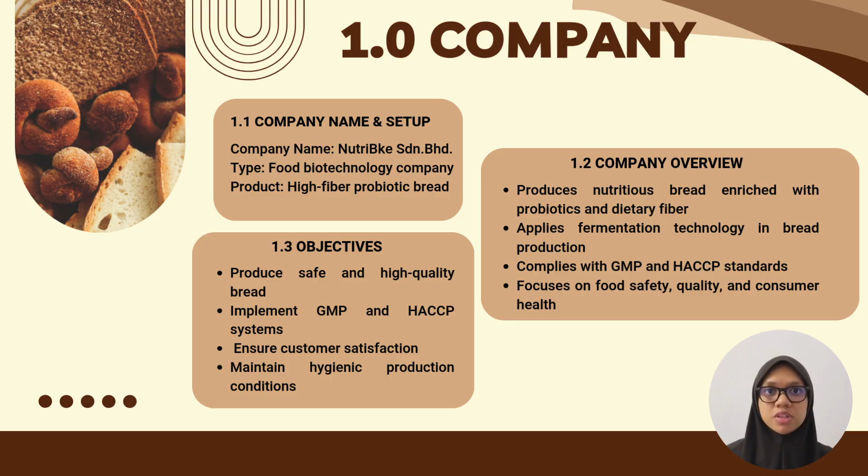NutriBke Sdn. Bhd. is a food biotechnology company that produces high-fiber probiotic bread. Our product combines dietary fiber and beneficial microorganisms to promote better digestive health. The company applies fermentation technology and follows GMP and HACCP requirements to ensure food safety and product quality. Our objectives are to produce safe and high-quality bread, maintain hygienic manufacturing conditions, and achieve customer satisfaction.

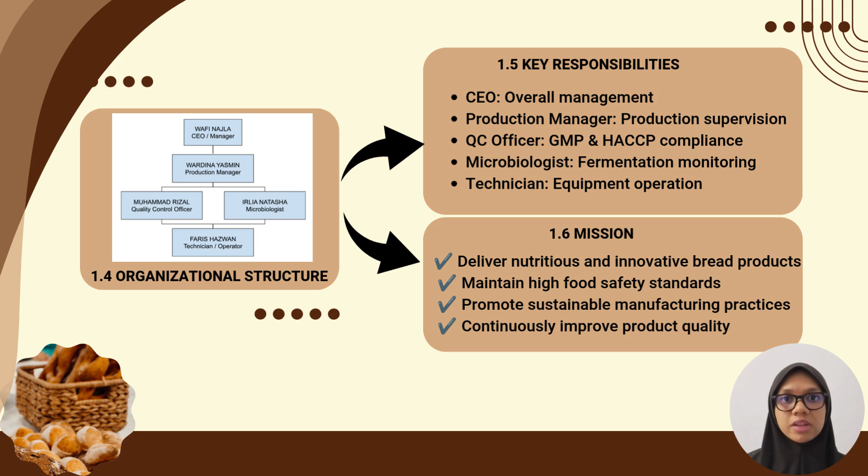The company consists of 5 key personnel. The CEO oversees overall operations, while the production manager supervises the bread production process. The QC officer ensures compliance with GMP and HACCP requirements. The microbiologist monitors yeast fermentation, and the technician operates production equipment. Our mission is to deliver nutritious bread products while maintaining high food safety standards and continuously improving product quality.

I will present the introduction of our case study on industrial bread production. Bread is one of the most widely consumed fermented food products in the world. It is produced using Saccharomyces cerevisiae, also known as baker's yeast. Based on previous studies, fermentation plays an important role in improving bread texture and flavor. Yeast activity also contributes to proper dough development and product consistency.

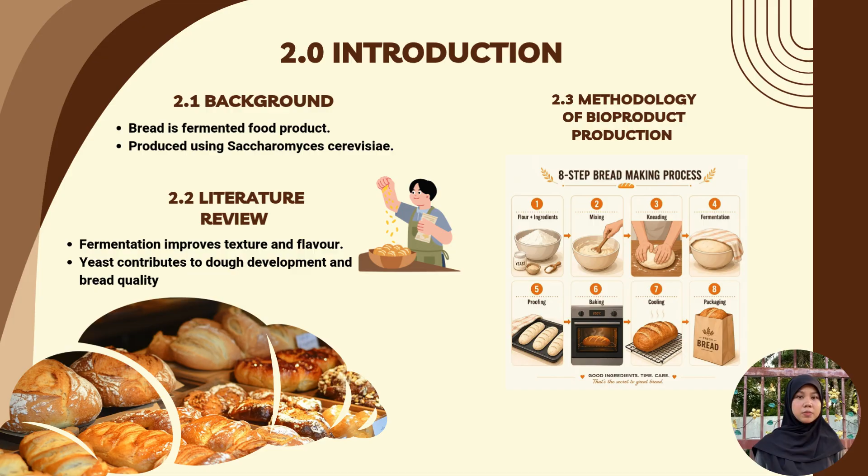It begins with raw material receiving, where ingredients such as flour, yeast, sugar, and water are inspected and weighed. The ingredients are then stored under suitable conditions before being measured according to the formulation. Next, the ingredients are mixed and kneaded using an industrial dough mixer to form the dough. The dough then undergoes fermentation and proofing, allowing yeast activity to produce carbon dioxide and increase dough volume.

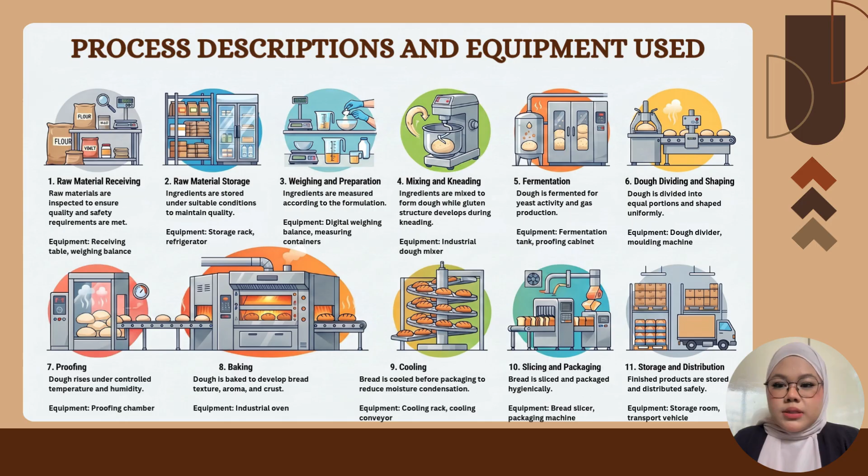The downstream process starts after the dough has been developed. The dough is divided and shaped into uniform portions before baking in an industrial oven. After baking, the bread is cooled to prevent moisture condensation, then sliced and packaged hygienically. Finally, the finished products are stored and distributed to customers. Overall, the upstream process ensures proper dough development, while the downstream process ensures the bread is processed, packaged, and delivered with consistent quality and safety.

Okay, today I will present the bioproduct plant layout based on safety levels 1, 2, 3, and 4 and GMP requirements. So, for the first zone, we have the preparation zone. This is where raw ingredients like flour arrive and get mixed, and it operates under standard basic safety rules, BSL1. For the second zone, the fermentation zone, the dough is divided and allowed to rise. This area uses special air control to manage humidity for the yeast.

For zone 3, the baking and testing zone, the dough is baked in large ovens, which acts as the main step to kill bacteria. People must pass through airlocks and foot baths to enter. So for zone 4, the packaging zone, this is the cleanest area. Workers must wear full protective gear to keep the baked bread perfectly safe from contamination before it is shipped out.

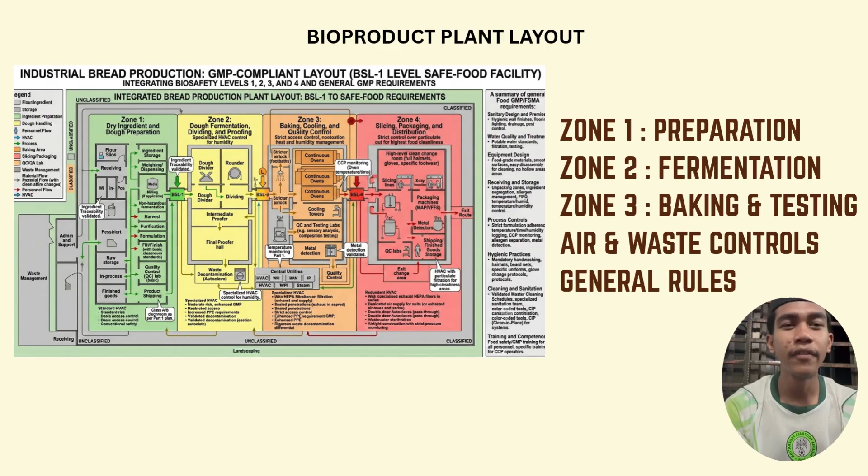Air and waste control: the facility uses advanced air filters to keep the air clean and an autoclave to safely sterilize and dispose of waste. So for the general rules of this plant layout, the entire factory relies on smooth, easy-to-clean surfaces, hands-free hand washing, and metal detectors to ensure food safety. For the process flow layout, we have 4 stages: A, receiving and storage, B, preparation and fermentation, C, baking and cooling, and D, packaging and dispatch.

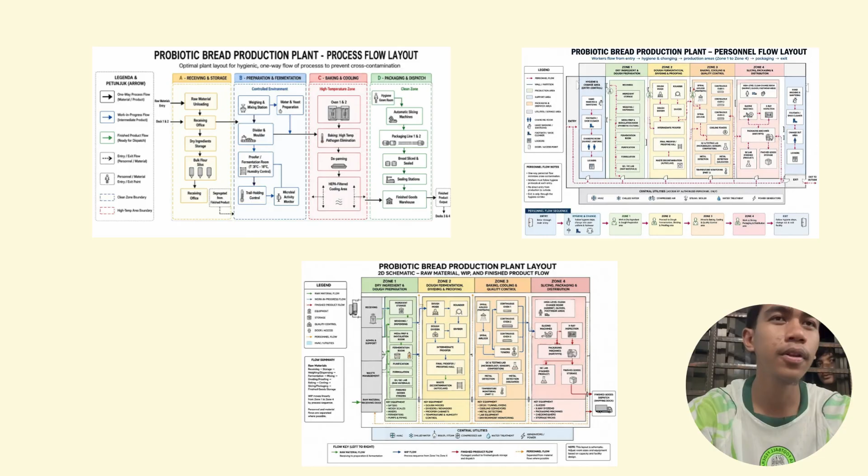Through our plant-wide assessment, we classify potential hazards into 3 major categories: biological hazards, chemical hazards, and physical hazards. To ensure absolute safety, we passed the 3 hazards through the HACCP decision tree and identified 2 critical control points. CCP1 is oven baking, which serves as our definitive thermal kill step to eliminate all pathogens in the dough. CCP2 is inline metal detection. Positioned after packaging, it acts as our final technological barrier to capture and isolate metallic hazards before dispatch.

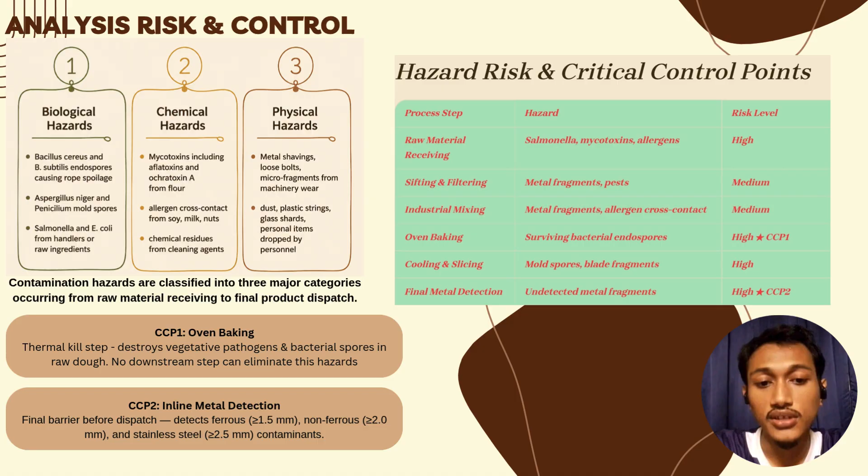The operational management of these CCPs relies on strict critical limits. For CCP1, the bread must reach a minimum internal core temperature of 85 degrees, checked every 2 hours. Any deviation requires immediate quarantine and complete destruction of the batch. For CCP2, we enforce a zero tolerance standard for metal fragments. The system is tested hourly using certified test pieces to ensure perfect functionality.

The materials then move to the processing area for weighing, mixing, kneading, fermentation, and dough shaping. Next, the dough undergoes proofing and baking in the baking area. After baking, the bread is transferred to the post-bake zone for cooling, slicing, and packaging under hygienic conditions.

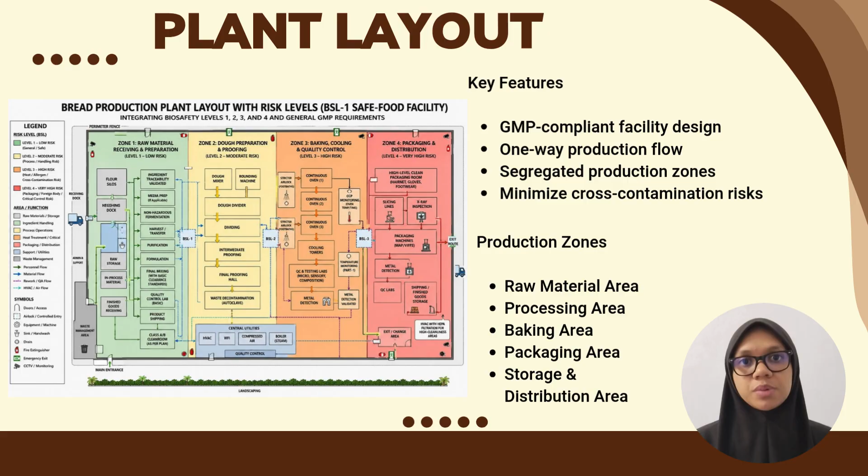Finally, the finished products pass through quality control before being stored and distributed. The one-way production flow helps prevent cross-contamination and ensures product quality throughout the manufacturing process.

For the biological hazard risk assessment, several potential contamination risks were identified throughout the bread production process. During raw material receiving and preparation, contamination may occur from mold spores or spore-forming bacteria such as Bacillus cereus present in flour and grain-based ingredients. There is also a risk of reduced probiotic viability before production begins.

The highest biological risk occurs during fermentation and proofing. If temperature, humidity, or fermentation time are not properly controlled, wild molds and pathogenic bacteria may grow, affecting both product safety and quality. Another critical stage is baking. Insufficient baking temperature or time may allow harmful microorganisms to survive in the final product.

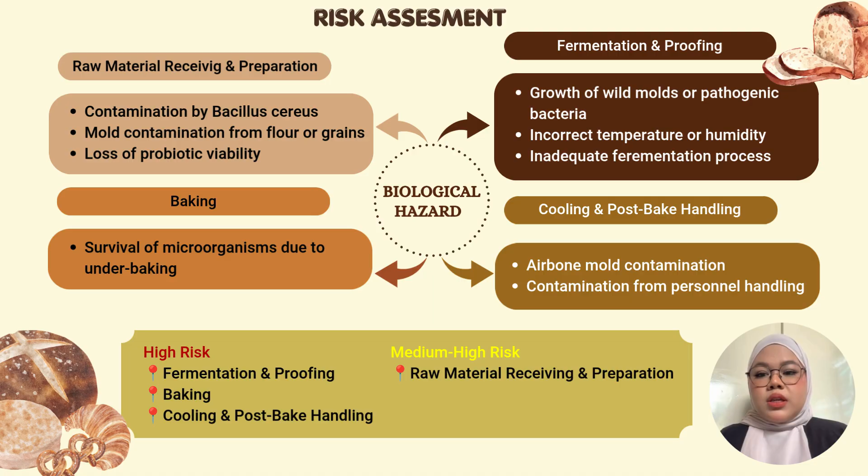After baking, the bread is exposed during cooling and handling. At this stage, airborne mold spores and improper personal hygiene can cause post-baking contamination. Based on the assessment, fermentation and proofing, baking, and cooling and post-bake handling are classified as high-risk stages and therefore require strict monitoring and GMP compliance to ensure product safety.

For risk assessment, chemical and physical hazards were identified during bread production. Chemical hazards may arise from cleaning agents, residues, or contamination from processing equipment. These contaminants can affect product safety and reduce product quality.

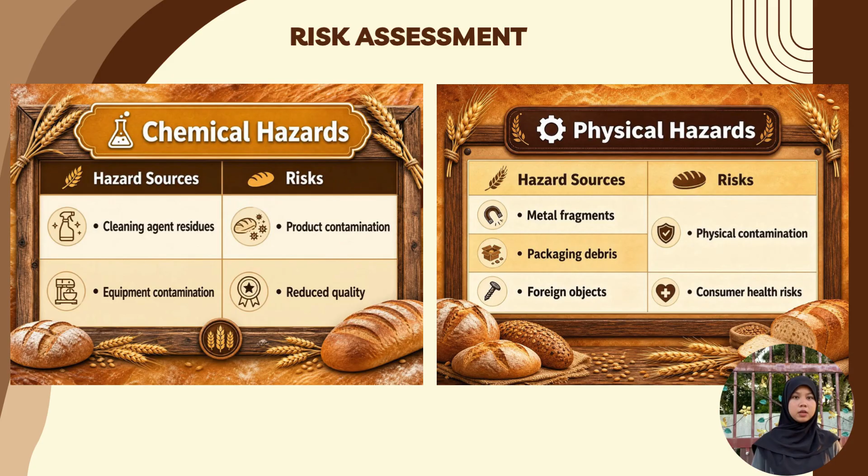Physical hazards include metal fragments from machinery, packaging debris, and all other foreign objects that may accidentally enter the product during processing. If not properly controlled, these hazards can lead to product contamination and pose health risks to consumers. Therefore, proper cleaning procedures, equipment inspection, and quality control measures are important to minimize these risks.

Thank you. I will present about personnel flow. Regulated entry and one-way movement. Employees enter through a designated entrance following strict one-way traffic to maintain hygiene and prevent cross-contamination. Hygiene and sanitation protocol. Workers proceed directly to the changing area and sanitation station to put on required protective safety gear. Designated zone access once sanitized.

Staff move straight into the assigned production zone based on daily operational requirements. So for controlled area transition, movement between different sections of the facility is tightly regulated, particularly when entering high-care or clean zones like the packaging department, to minimize contamination risk.

Standardized exit flow. At the end of the shift, personnel exit the facility by adhering to a specific path that routes them back through the changing area. Compliance assurance. This structured flow guarantees that the facility consistently aligns with good manufacturing practice and food safety regulations.

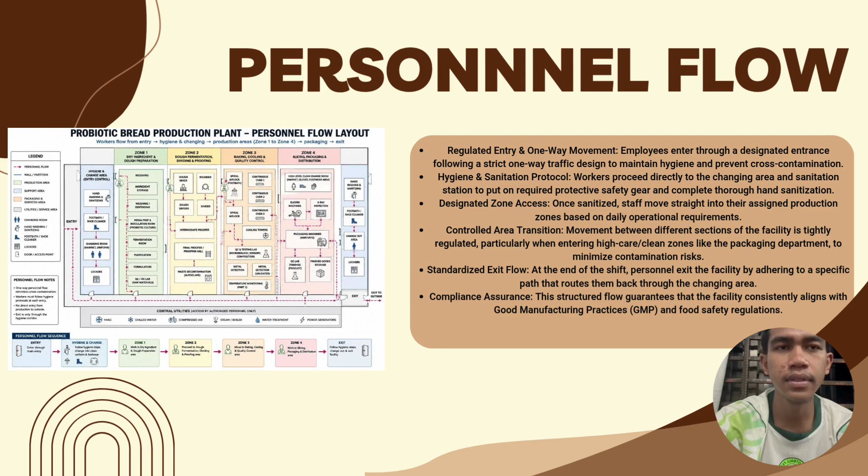Sequential work-in-progress flow. Materials move through the production phases in strict non-overlapping sequences, like mixing, fermentation, baking, cooling, and packaging. And direct packaging supply. Packaging materials are delivered directly to the packaging section as required, preventing unnecessary handling in earlier processing zones.

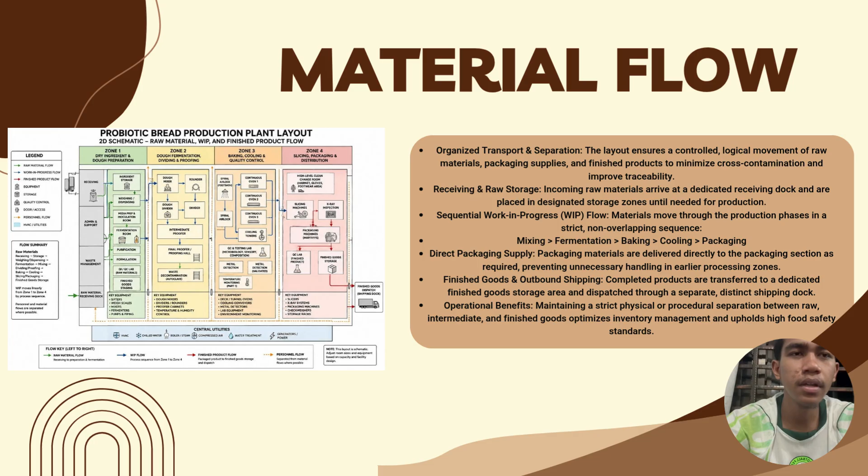Finished goods and outbound shipping. Completed products are transferred to a dedicated finished goods storage area and dispatched through a separate, distinct shipping dock. And last, operational benefit. Maintaining this strict physical and procedural separation between raw, intermediate, and finished goods optimizes inventory management and upholds high food safety standards.

To ensure both food safety and strict regulatory compliance, we utilize a proactive risk management framework built on an FMEA risk matrix and a targeted HACCP system. Through this methodology, we identified two critical high-priority vulnerabilities that demand absolute control. First, on the biological front, second, on the physical front. To eliminate these threats, we implemented two definitive critical control points, or CCPs.

CCP1 is our oven baking process. By continuously logging core temperature data, we guarantee the precise thermal lethality needed to destroy pathogenic microbes. CCP2 is our inline metal detection located just before packaging. This scans 100% of product flow, automatically rejecting any unit containing a metallic hazard.

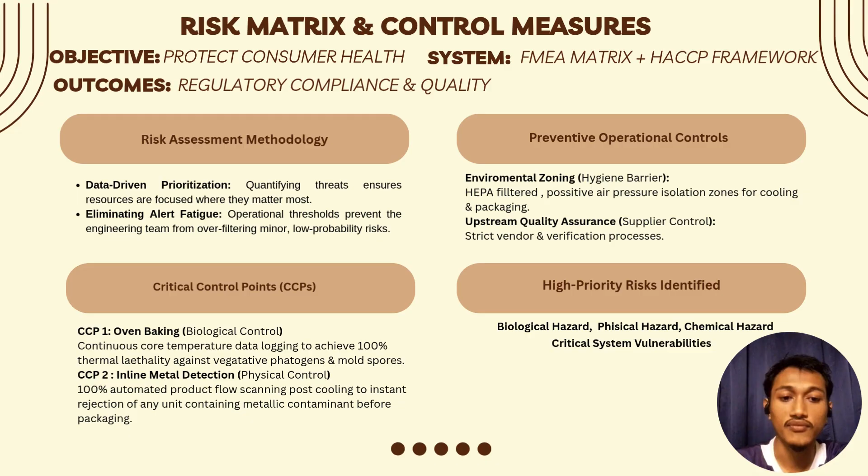Supporting this final defense with facility-wide operating controls, we enforce strict environmental zoning and use HEPA-filtered positive air pressure to prevent airborne mold during cooling. Furthermore, our upstream quality assurance program vets suppliers so that raw flour and probiotics are pre-certified before entering the facility.